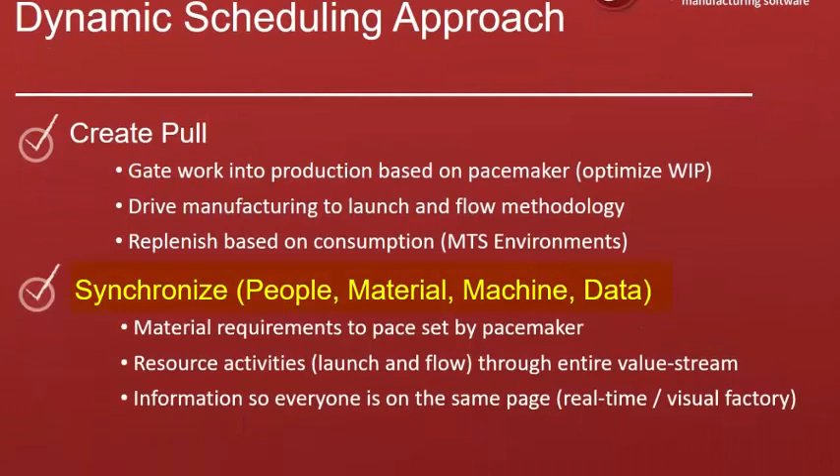As our name Synchrono implies, synchronization is very important to us. We are really the only solution in the market that synchronizes these four elements together: people, material, machines, and data throughout the manufacturing environment and the extended supply chain. We give you tools to monitor the system and enable continuous improvement.

A big difference between SyncManufacturing and traditional software in the market today is that most systems work in a silo model or batch model. The engine for planning and scheduling runs typically one time a day or sometimes only once a week. The engine runs taking into account all variables in the environment and comes up with a plan and a schedule. Then that's thrown over the wall to production and purchasing for them to execute on it. Production and purchasing are in the dark until the engine runs again.

The problem with that is that variability occurs in the meantime. The moment you publish the plan, variability occurs and the plan quickly becomes invalid. This drives people in manufacturing environments to create workarounds such as manual schedules and plans, hot lists, and Excel spreadsheets of what people should be working on, all because of the batch system and lack of real-time information.

In contrast to the traditional silo model, we built an always-on, real-time planning, scheduling, and execution engine. All of those things we consider to be coupled together and tightly integrated with each other. Planning and scheduling always knows what's going on in execution and vice versa. And we also built what we call an adaptive planning and scheduling engine.

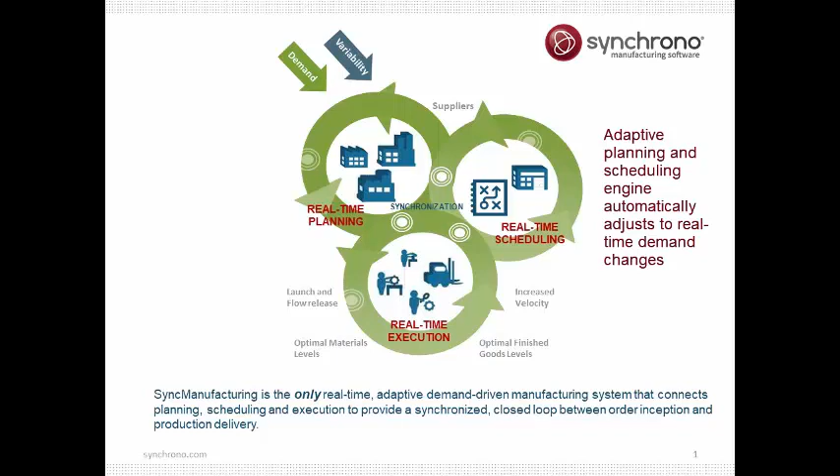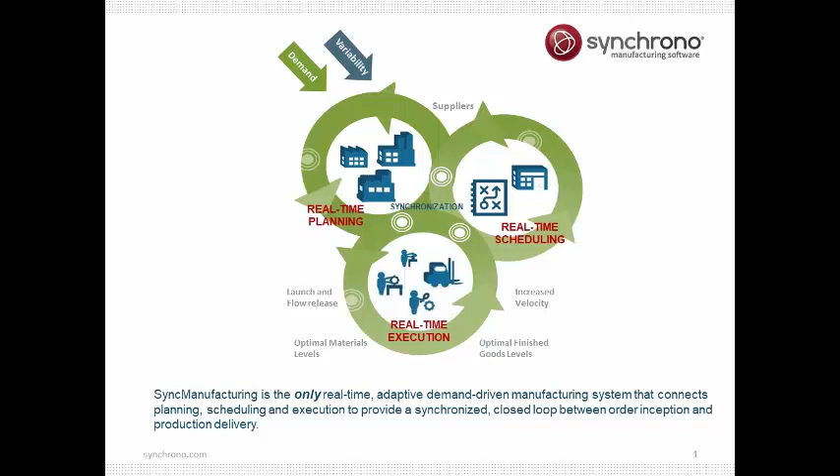This means as new demand orders are entered into the system and dates are changing on existing demand orders, the system is always realigning the schedule to meet these changes, as well as keeping an eye on what is going on in execution. We can really get to the point where SyncManufacturing is the schedule that everyone is working off of and get rid of all those spreadsheets, hot lists, and post-it notes. We now have a living, breathing schedule that is always in alignment with what is going on in the manufacturing environment.

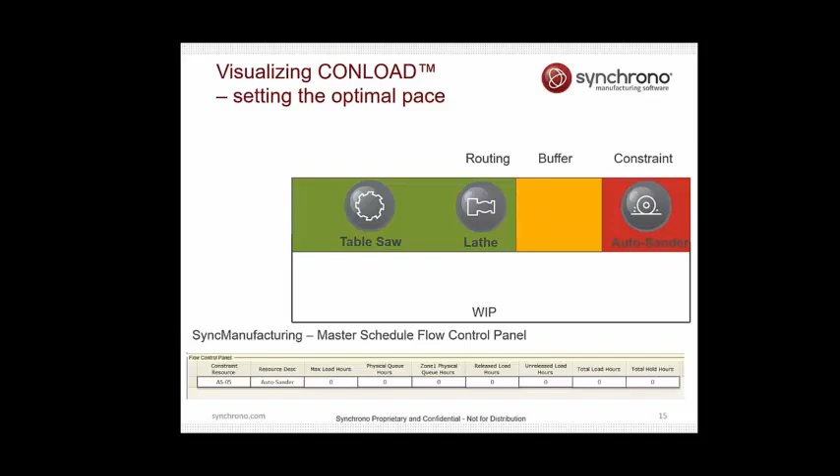The way that SyncManufacturing creates pull and flow is through a patented scheduling algorithm that we call Conload. I'm going to use a simple example to illustrate the fundamentals of Conload. Conload uses the concept of constraints or pacemakers to understand the pace or capability of the organization. One of the things we want to do with constraints is to make sure they always have enough work to do. We are trying to define the amount of inventory or work in process that is needed to make sure the constraint or pacemaker is always running, but no more than that.

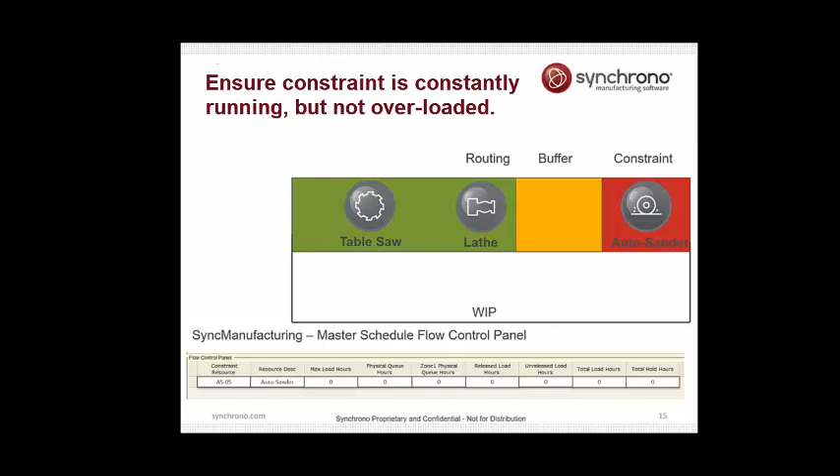We define WIP based on the standard unit of measure in a manufacturing organization. That unit of measure is time. Specifically, how many hours does it take to complete an operation? For every customer order we are looking to release into the process, what we are really looking at is how many hours the order takes on each of our constraint resources.

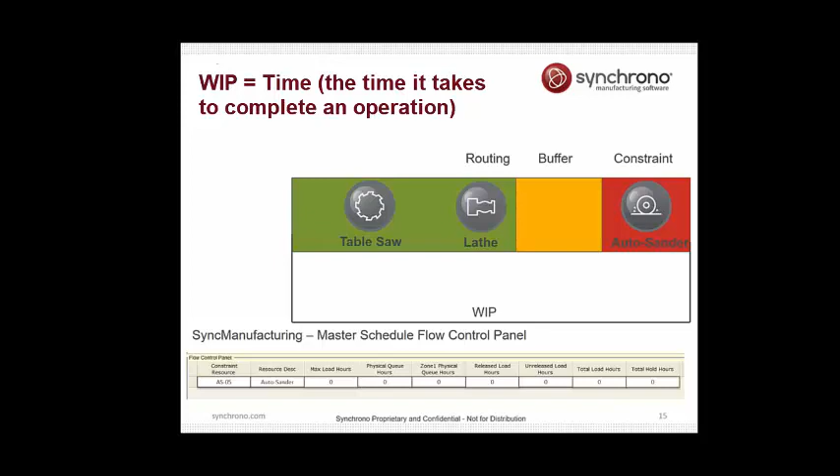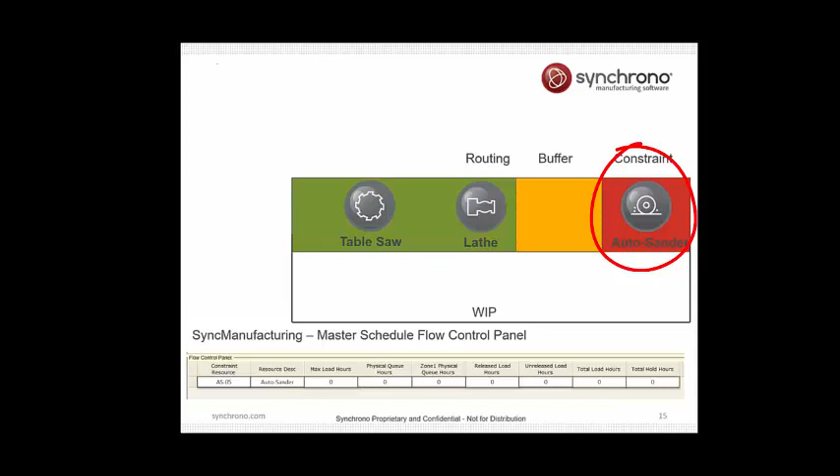And what we do is set up the total number of hours we have to release into the system to make sure that our constraint is always running, but no more than that. It does not mean all the work is sitting at the constraint, but it's somewhere between the release point and the constraint. In this example, the auto sander is our constraint. The auto sander is being fed by two upstream operations, the table saw and the lathe.

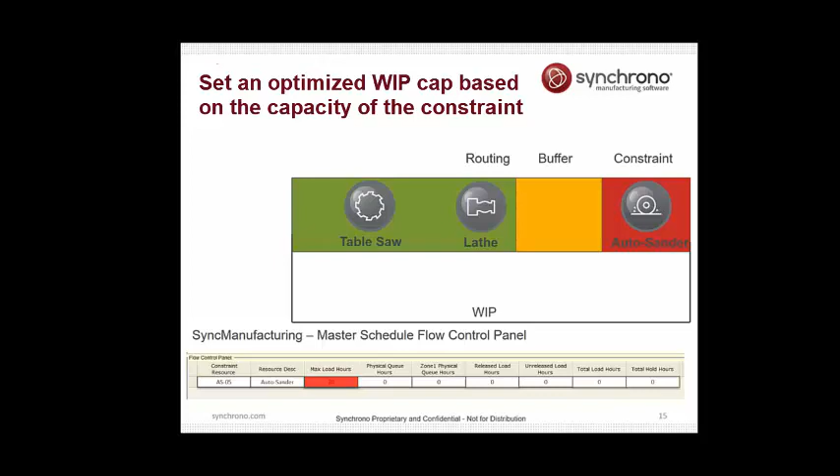Really, what Conload allows us to do is set an optimized WIP cap. This WIP cap will be based on the auto sander's capacity. Again, we will release enough work into the system to make sure the auto sander is always working, but no more than that. In this example, the max load or Conload hours is set to 20.

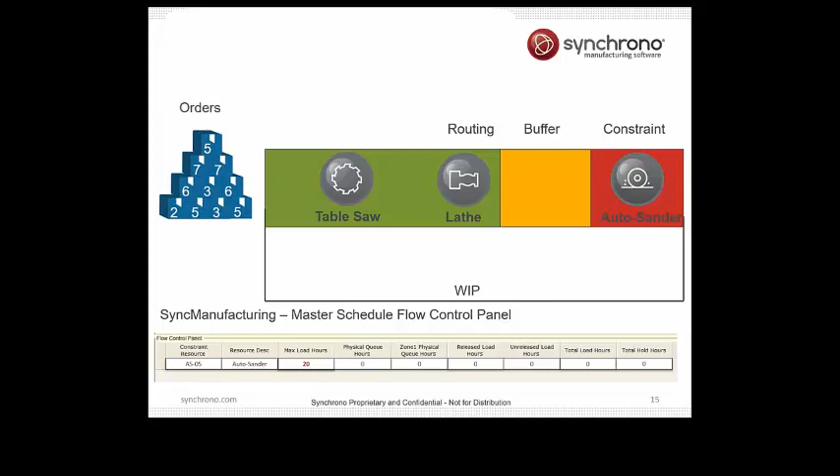Once we have set the max load, then any work we need to release into the system, whether they are production orders or replenishment orders, is going to be gauged based on how long it takes on our constraint, the auto sander. The blocks on the left represent orders to be produced. The number on the block represents the runtime or load of the order on the constraint.

Conload will release work into the system. It's released 5 hours. Now it's released 12 hours. And see, we are still not at or above our max load. So it continues to release work into the system.

Until we are at or above our max load of 20 hours. In this case, we are now at 25 hours released. Now the system says hold up and will not release more work into the system until the auto sander completes at least 5 hours of work, and we are back down to 20 released hours. So as it works on this work, eventually we have consumed the 5 hours and are now back down to 20 hours, and now it will release the next job into the system.

So Conload is controlling the release of work into the system based on what the system can handle, which is defined by the constraints. The cool thing about that is since we have a real-time planning, schedule, and execution system, the system is looking at the constraints to see how fast they are running. If they're running faster than expected, it will release faster. If it's running slower than expected, it will release more slowly. But always keeping that optimal level of work in process.

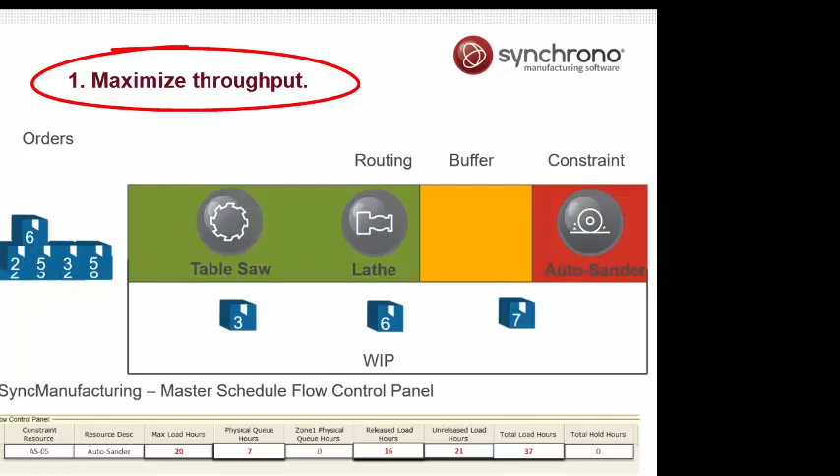If you think about this, what we end up doing is, one, we end up having only what we need in the system to maximize throughput through the system. In addition, we cut down on some of the bad things that occur when you have too much WIP in the system, such as people working on the wrong things, people cherry picking work, people having to handle materials more than what is necessary. Also, since we keep a nice consistent level of work in process, we keep a nice consistent level of queues in the process.

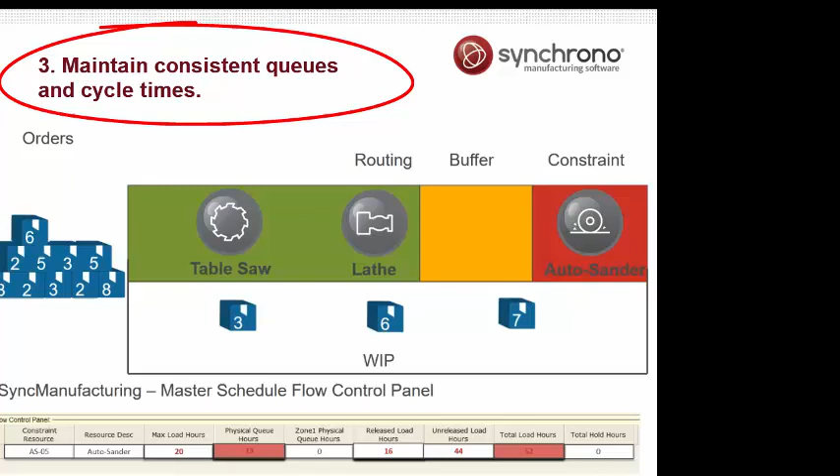In most environments, queues are the largest determinant of cycle time, which means if we have nice consistent queues, we get to the point of having nice consistent cycle times. And that allows us to have very predictable cycle times, and we're more predictable as an organization.

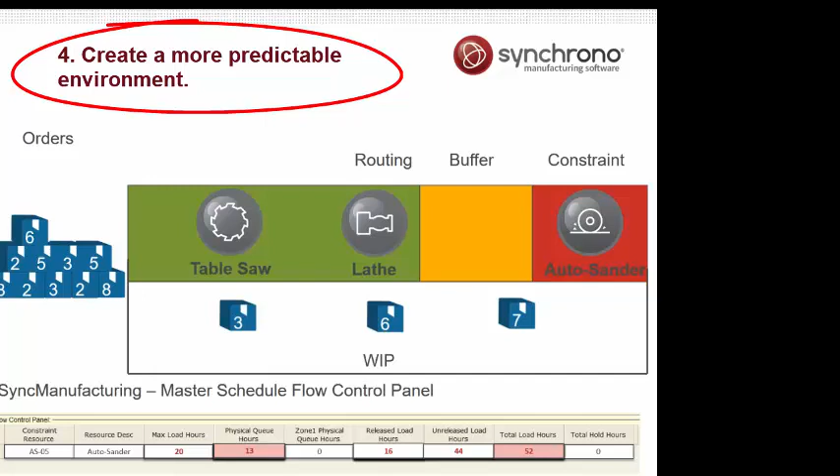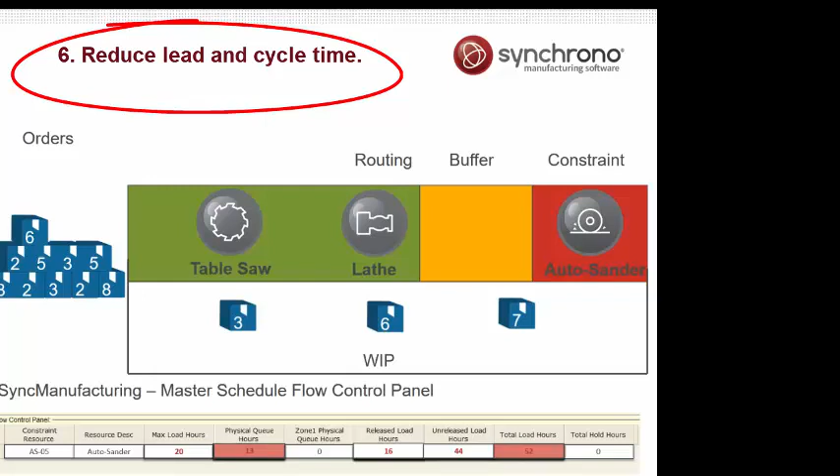The last thing I would say about this is by only having in the system what the system needs to be its most effective as far as throughput, we really ramp up the flow through the system and dramatically decrease cycle time and lead time. Because then when something gets released into the system, it now has a clear and consistent path to run through the system as quickly as possible.

You can define more than one constraint in your system. If you do have more than one constraint, then each order is evaluated based on which constraints it goes through and the Conload supporting those constraints, and will gate the work into the production area based on the most overloaded resource. Now we'll move into a demo of SyncManufacturing.

One thing I want to highlight is that SyncManufacturing is a browser-based solution. Whether you go through our normal delivery method, which is through the cloud, or choose to have the app on-premise, the users will be interacting with SyncManufacturing through their favorite web browser. You will notice that there is a toolbar across the top to take you into different areas in the software. I'm going to step into what is called the demand order maintenance screen.

I should point out that SyncManufacturing, as well as our other solutions, are best-of-breed solutions. They are made to augment and enhance the capabilities of your existing business systems. SyncManufacturing is typically integrated with an ERP system on the customer side. We do a real-time integration with that ERP system, pulling out any information relevant to creating a solid schedule.

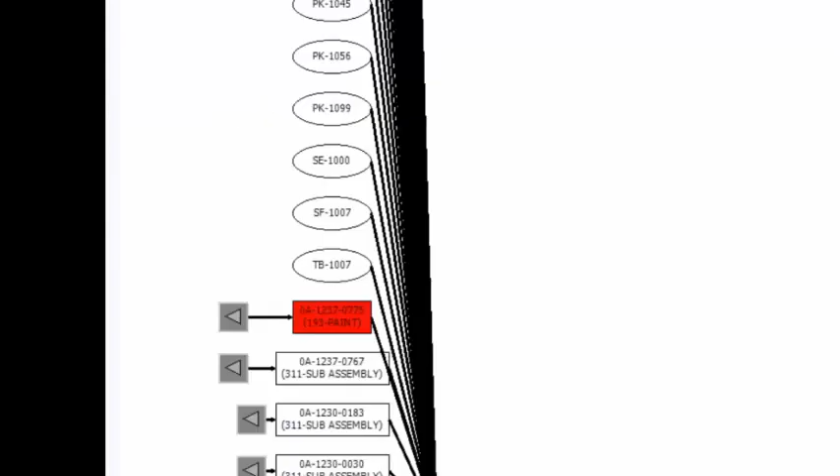Demand order maintenance shows a list of open sales orders or forecast orders or quote orders. So one thing that the system does is as soon as a sales order or forecast order or quote order comes into the system, it is automatically planned and work orders are created and the structure exists automatically without any interaction from a planner or scheduler.

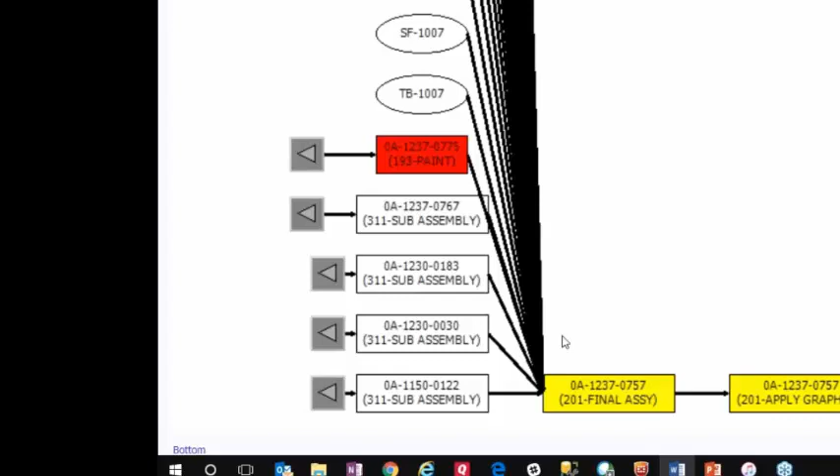This is what we call the production plan, which is a graphical representation of the BOM and routing. The rectangles represent operations for the production orders generated to produce this particular sales order here at the end. The ovals represent material coming from inventory, such as buy items and make-to-stock items.

Within SyncManufacturing, we use color coding, red, yellow, and green, to create a sense of urgency. Green means we are okay or maybe working a little ahead. Yellow is really the area people should be working on operations. Red is when we are in an expedite mode. Also, as materials become available, the ovals turn white. Materials that are not white represent the status of those materials. As production completions are occurring on the shop floor, the operations turn white.

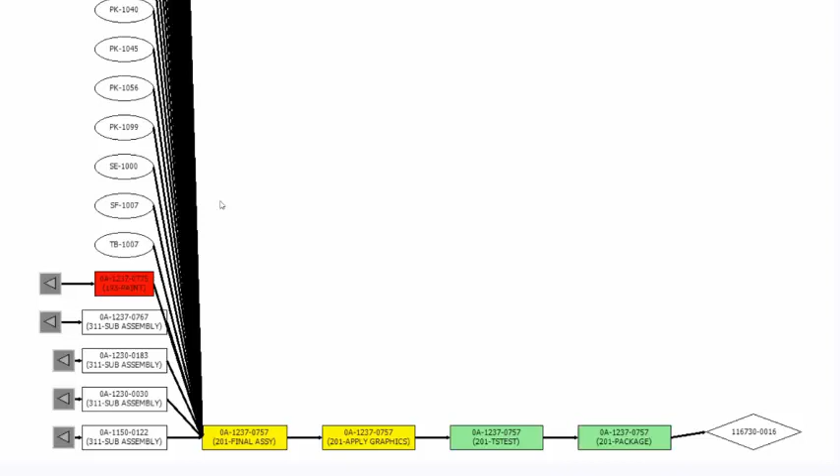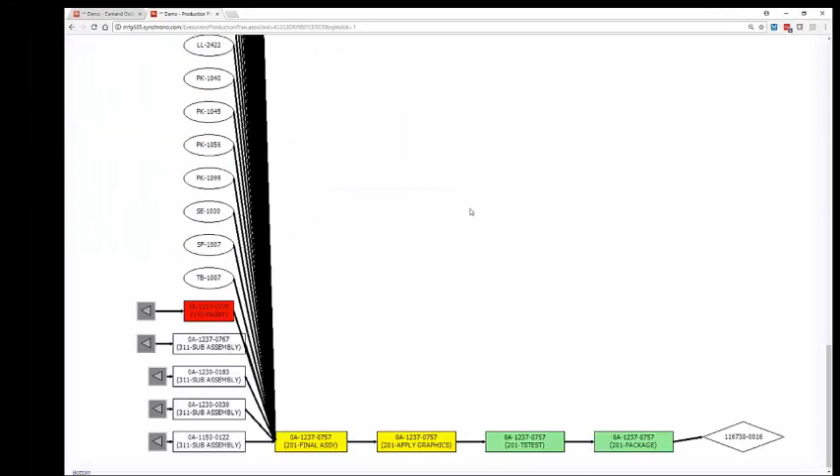One of the things we can use the production plan for is to view the multi-level or value stream of the order flow through the process. I can also understand the status of the order by drilling back and seeing where the order is hung up in the process. For example, if we go down this chain, we see that we're up to metal fab for this item, and we can drill even further back to see that we're all set in metal fab for this item. Ideally, this order would be in the final assembly area here, and currently we have 4 out of 5 sub-assemblies ready to produce this product.

The next screen we're going to look at is called the master schedule. The master schedule allows us, by constraint, to look at unreleased orders that need to get released into the production environment.

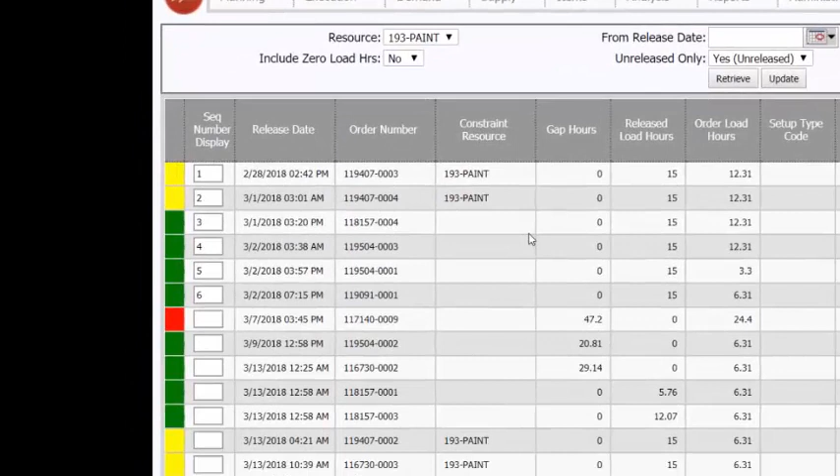We're going to take a look at the 193 paint constraint. It is going to be working off those principles of Conload that we discussed before. Conload for this resource is currently set at 15 hours. Max load hours is 15. These are the orders waiting to be released into the system.

The first one is going to wait until we hit the 15-hour mark. It takes 12.31 hours, so the next order will be offset from the first one by approximately 12.31 hours, and it can be released into the system 12.31 hours later.

In addition, the master schedule shows red, yellow, green. Red means the order is going to get released into the process late and is expected to be delivered late. Yellow means it is being released a little bit late, but SyncManufacturing still believes it will get completed on time. Green means it is getting released on time and will meet the customer due date.

In a SyncManufacturing environment, one of the things that changes a lot is that schedulers start to manage the exceptions, the red and yellow orders, rather than managing every order in the system. A big part of scheduling's job is to come to the master schedule and check to see if there are any yellow or red orders and try to clear those up before they release to the shop.

If something is showing yellow or red, it would be due to one of two reasons. The first possibility is there's a constraining resource, in which case SyncManufacturing will show the most constraining resource here, where you see 193 paint in the constraint resource column. If there's a constraining resource that is blocking us from meeting the customer due date, it comes down to whatever options are available to scheduling to either reduce the load on that resource or increase the capacity on that resource.

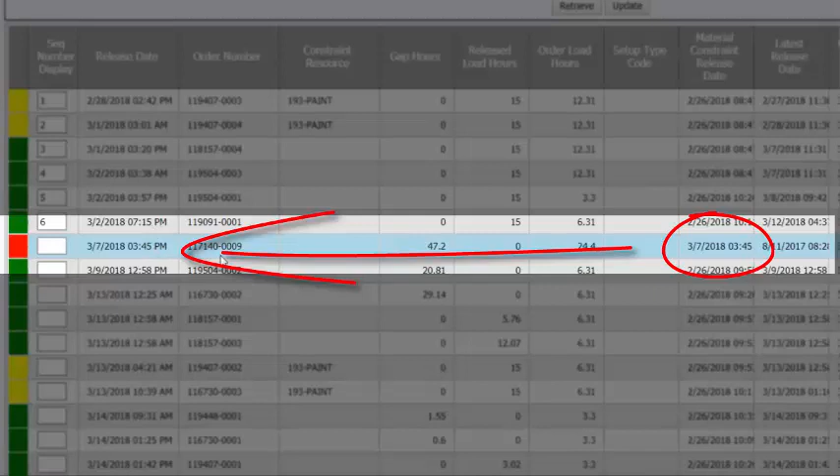The other thing that can occur is a material constraint. For example, on this particular order, there's no resource constraint, but the material constraint date and the release date are the same, indicating that this is being constrained by materials.

You can right-click on the order and go to a report we call item shortage report, which will show you which material is holding up the release of this order. In this case, it's this item here, and it's not available until March 12th.

So from here, the scheduler would want to talk to purchasing to see if the materials can be expedited to produce the order on time, or even better is that purchasing is already monitoring the item shortage report and addressing the material issues before the scheduler sees it as an issue.

Once work is released to the shop, the resource priority list takes over. Within the resource priority list, an operator can type in their resource name and get a prioritized list of what production orders they need to complete to support flow through the manufacturing facility. In this case, I'm going to look at the 311 subassembly resource.

This list is prioritized top-down by what we call the cycle consume percent. Cycle consume percent is the amount of time between when this operation needs to begin on this resource and when it needs to be completed compared to the number of working hours that are remaining before the order needs to be delivered. We find that cycle consume percent really keeps people on the same page and is that synchronizing force to make sure everything is in alignment, whether it is a simple production flow or a large capital equipment manufacturer with hundreds of parts that have to come together at a final assembly point.

Also on the resource priority list, we show red, yellow, and green color coding to show a sense of urgency. Red is where the operation is in expedite mode. Yellow is where they should be working on it. Green means they may be working ahead.

In addition, we show chevrons on the left-hand side. That's these little black arrows here. We call those chevrons.

Chevrons indicate whether or not everything that is needed to execute this operation is available to the operator. This gives the operator confidence that the moment they pick up that order and begin working on it, they have everything they need to complete the process. This can be as simple as all materials are available and all upstream operations are complete, to the more complex.

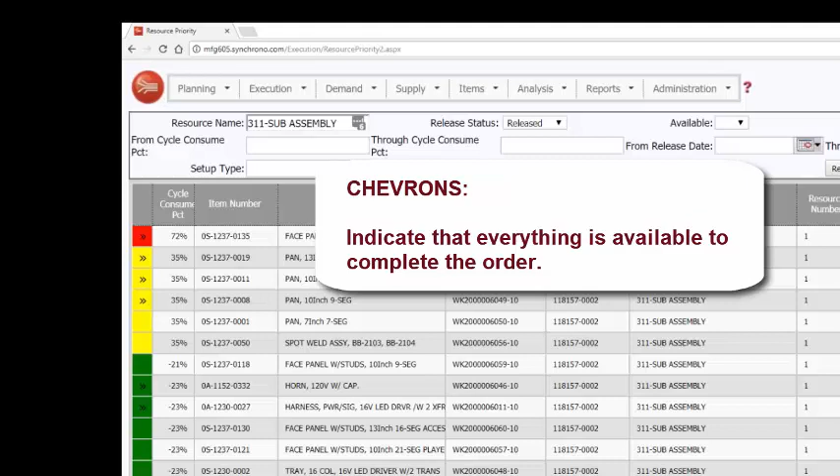For example, in some environments, we are integrated with the customer's PLM system, and we are not only checking that material is available, but that the proper tooling is available and the right rev of the machine program is ready, and that the quality plan has been established. All things necessary to make sure that the operator can complete the process.

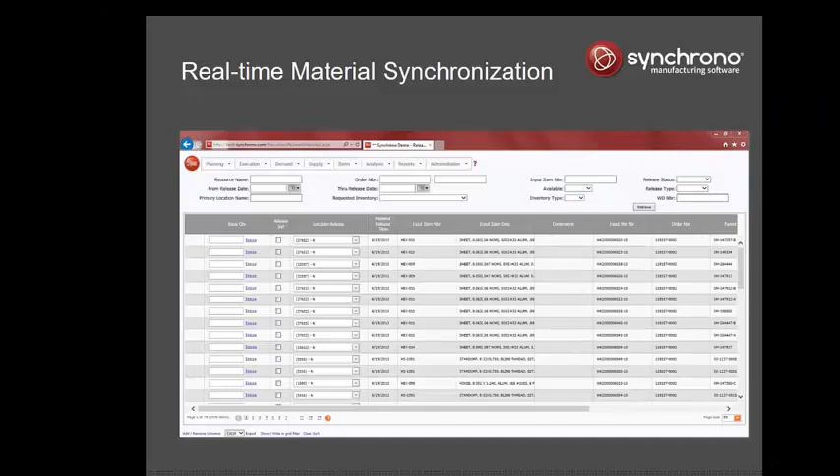In SyncManufacturing, there is also a full-scale materials planning engine that synchronizes the materials to the schedule that is established in SyncManufacturing. Our customers use this to make sure materials are in alignment and that materials are supporting the schedule that has been generated.

We have customers that use SyncManufacturing to give real-time quotations of capable to promise dates to their customers. As customer service is taking orders, SyncManufacturing can do a real-time check of the bill of material and routing to make sure there's enough capacity and materials to meet that customer request date. If the date the customer wants cannot be met, SyncManufacturing will tell you the earliest date that the order can reliably be promised to the customer.

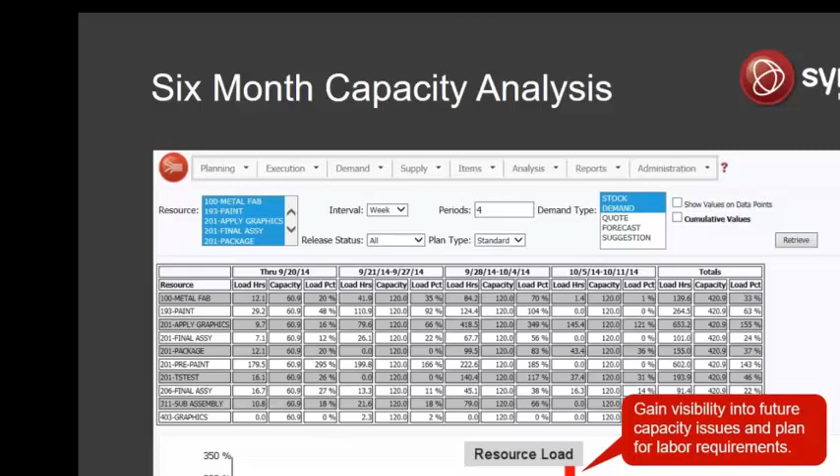In SyncManufacturing, we have what we call a resource load report, in which the user can choose to display load versus capacity from an infinite capacity point of view or from a finite capacity point of view. This can be short-term, what's coming up in the next week or two, or longer-term, what's coming up in the next 3 months, 6 months, or a year.

Some key things to note from the SyncManufacturing demonstration is that SyncManufacturing is focused on providing the single accurate source of information. We are taking in real-time data feeds from external systems so we can understand the status and variability within the environment. Then we are using our real-time planning, scheduling, execution system to determine how that impacts the environment and communicating that back out to the organization.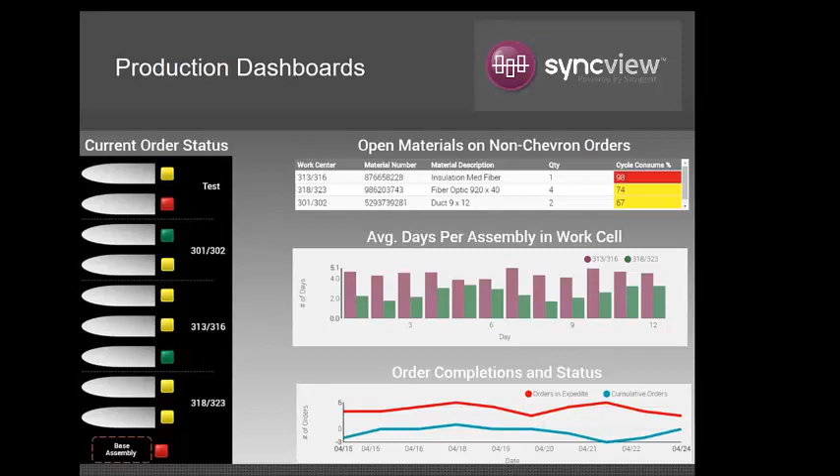In this first example, we are looking at resources within the production environment and current order status, how the orders are flowing through the system, where work is starting to queue up, and what is available to work on. This is a different view of how the resources are performing.

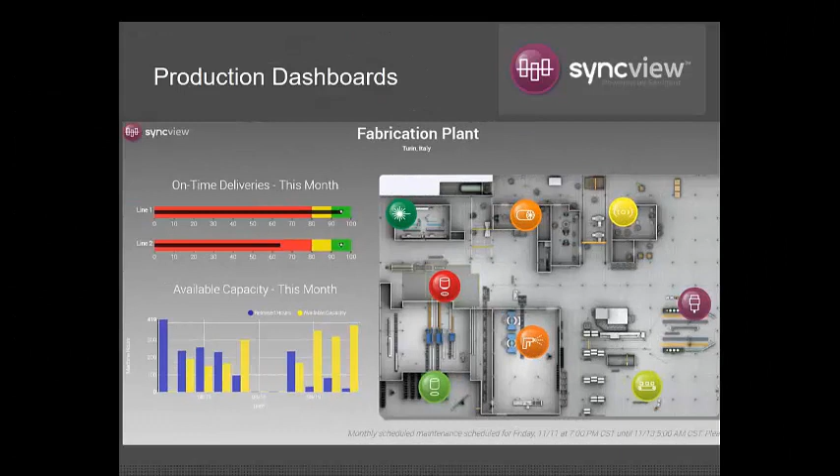Also, it gives us a unique view of the state of the machines. On the right-hand side, it is showing a bird's eye view of the manufacturing environment and the current status of the individual resources in that environment.

Another example is taking a look at actuals to our expected throughput through the environment, as well as getting an understanding of how well the resource is working its way through its queue or work in process.

Here's a view of the key capabilities that we covered in our demonstration today. SyncManufacturing is a dynamic and adaptive planning, scheduling, execution system. Within any environment that is running SyncManufacturing, the work is instantly prioritized and communicated throughout the enterprise.

We're the only system on the market that does real-time synchronization of the 4 key elements in manufacturing: people, materials, machines, and data. In order to create pull and flow through the manufacturing environment, we use our patented Conload scheduling technology. We give you tools to understand your true capacity to be able to optimize flow and throughput through the environment.

We give you real-time priority of the shop floor so that everyone within the production environment can go to SyncManufacturing and know that they will be on the same page with everyone else within the organization.

SyncManufacturing allows you to manage your replenishment process and order flow in a highly visual way. And there are what-if capabilities to work through different planning strategies to help you decide what will be the most successful strategy for your organization.

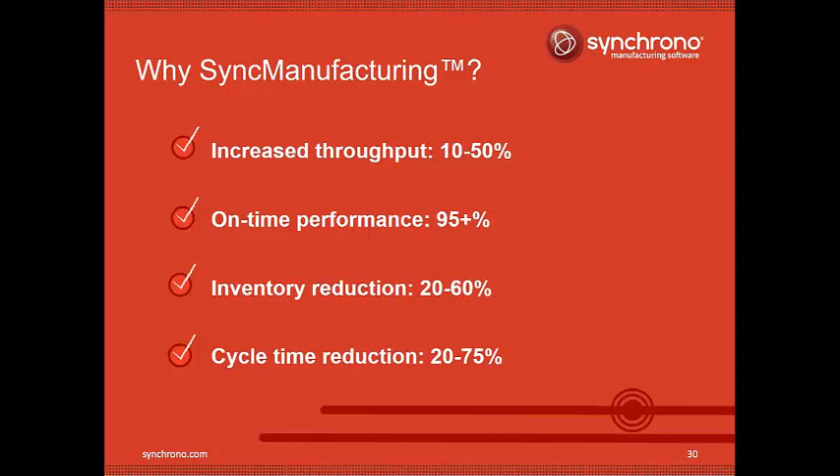The reason why customers implement SyncManufacturing and continue using our solutions is to drive the key performance indicators that manufacturers care about. Here are some examples of what you can expect to see if you implement SyncManufacturing within your environment: increased throughput, improved on-time performance, inventory reduction, and cycle time reduction.